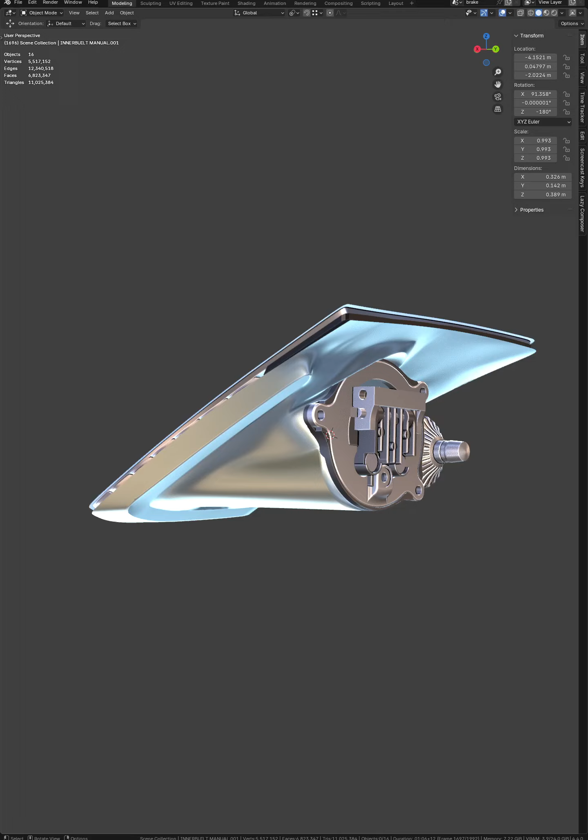Okay, so on the headlight, this entire weird back face I had to make manually, which I was trying not to have to do because it was a huge pain in the dick.

But now I can super easily add your mounting tabs. And then I got to cut out the holes for the switch backs and whatnot.

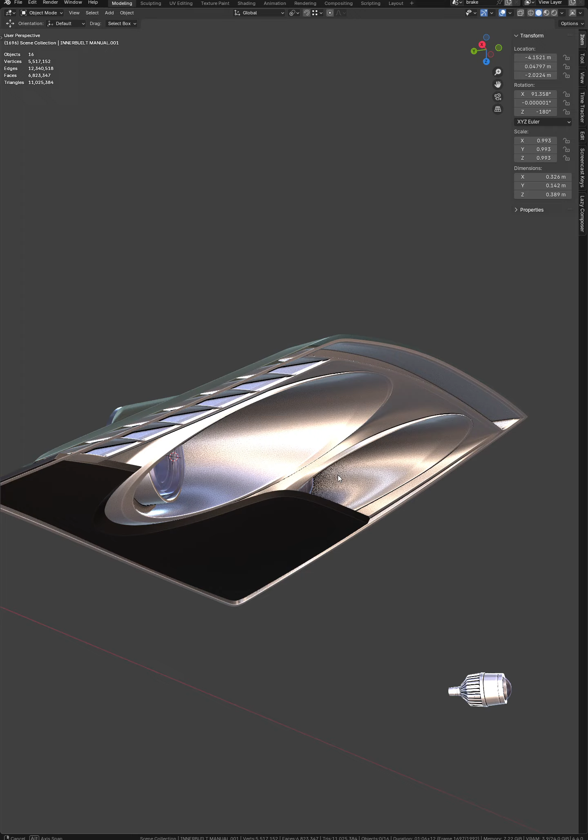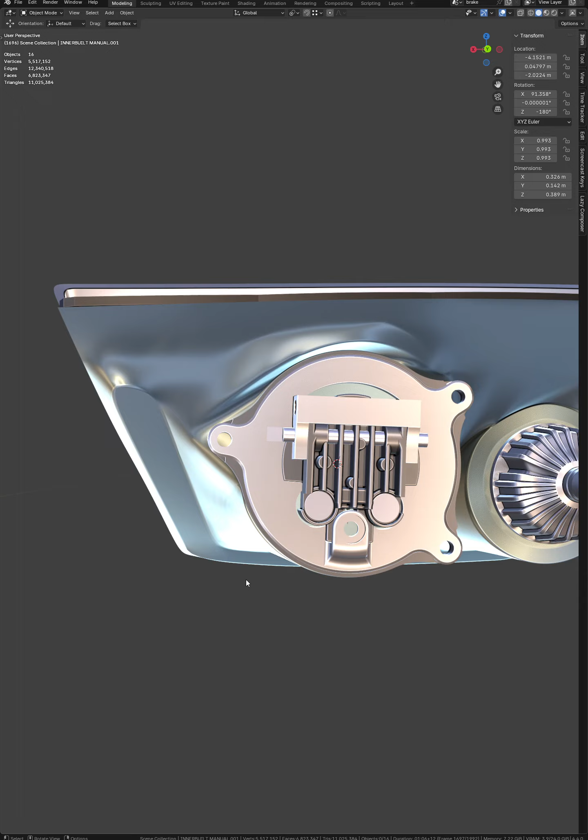But yeah, so for mounting, putting the mounting tabs to mount the headlight onto the car, that's not a concern at all. I just haven't done it yet because I have to have this other shit figured out to be able to permanently merge them onto it, because then I lose the ability to edit it at all.

Yeah, so this doesn't have the brim to wrap the headlight around it or anything like that, just on this version, but that's done. That's not a thing that's going to take any time. And then the lens fits over this still too, which is nice.

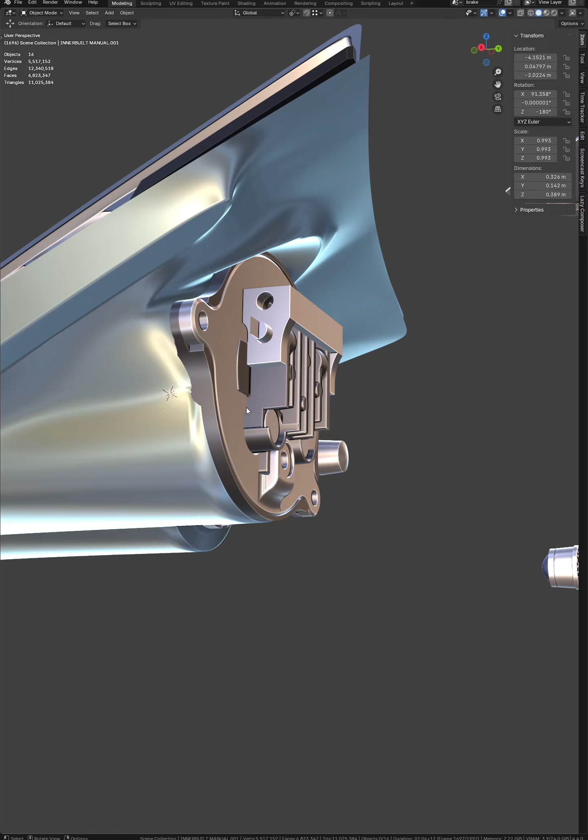But anyway, for the headlight mounts, here's sort of what I have. Hide the back face, hide this.

So this one I don't have the mount built for it. It's way simpler, it just takes a bolt straight through the side.

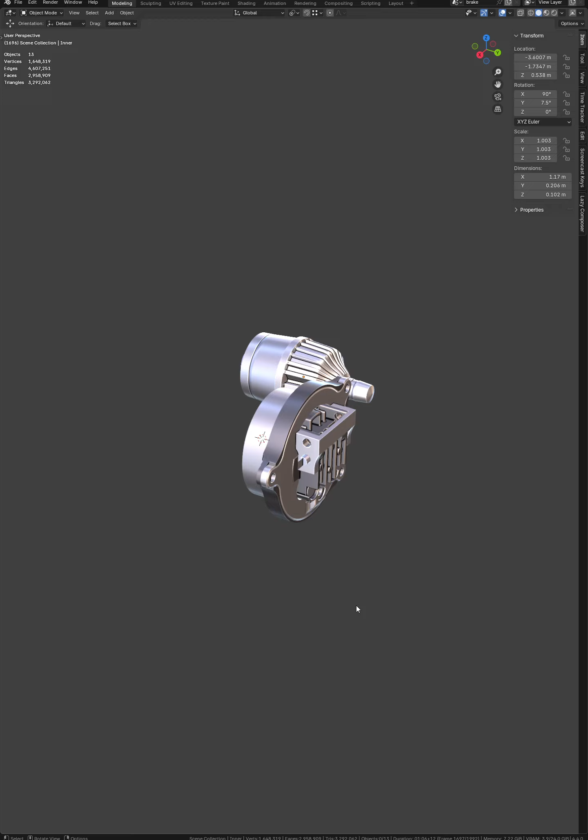So I made this thing because the way the mounts are on this headlight, if you want to be able to remove it from the back, which makes sense if the headlight has a lens on it, the mounts have to go. The mounts are set up to where you have to mount it to something and then put it in the back.

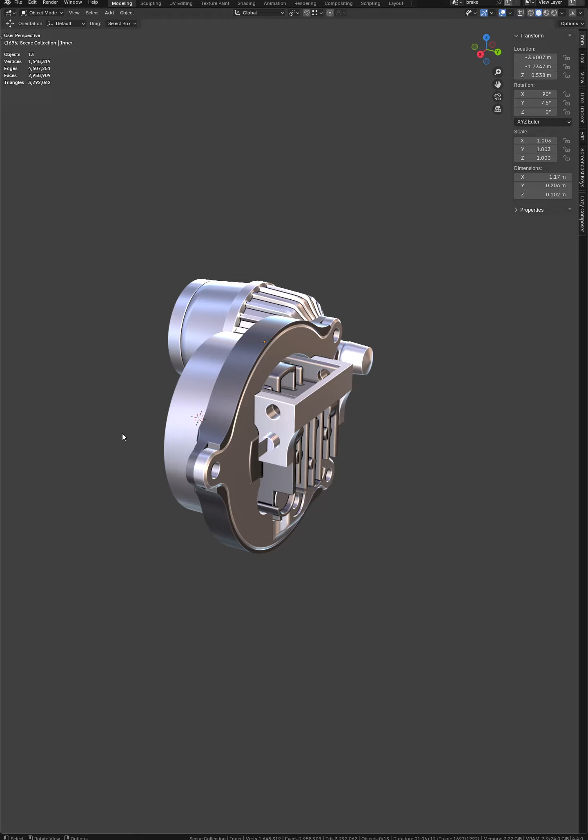So this is sort of what I had. This is a fucking shitload of work, but I don't know if it's the best idea, at least not on like a simple first run of the headlight lens.

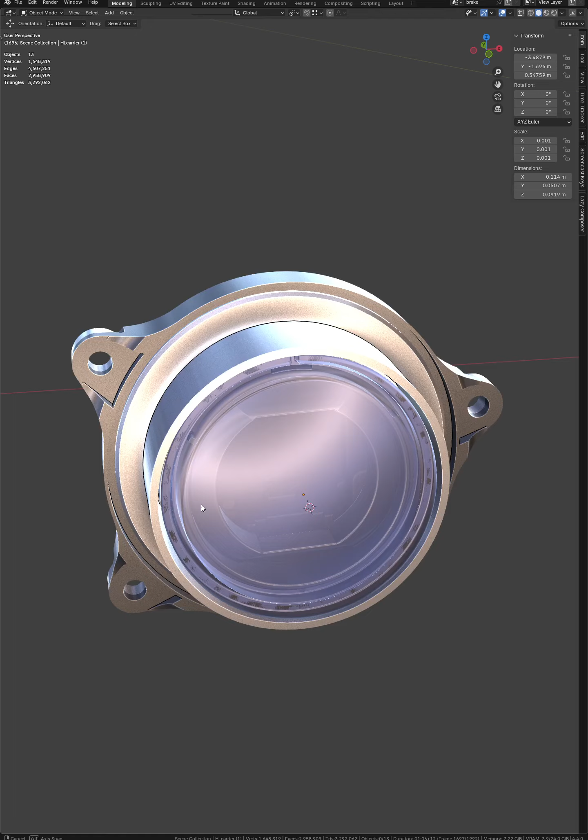Like if we're able to do it cheaply, I don't think a printer will pick up the details this thing has, and then still be able to print the whole housing without sectioning it. And then there's really not a way to section the headlight and still be able to sand the join lines out of it and shit.

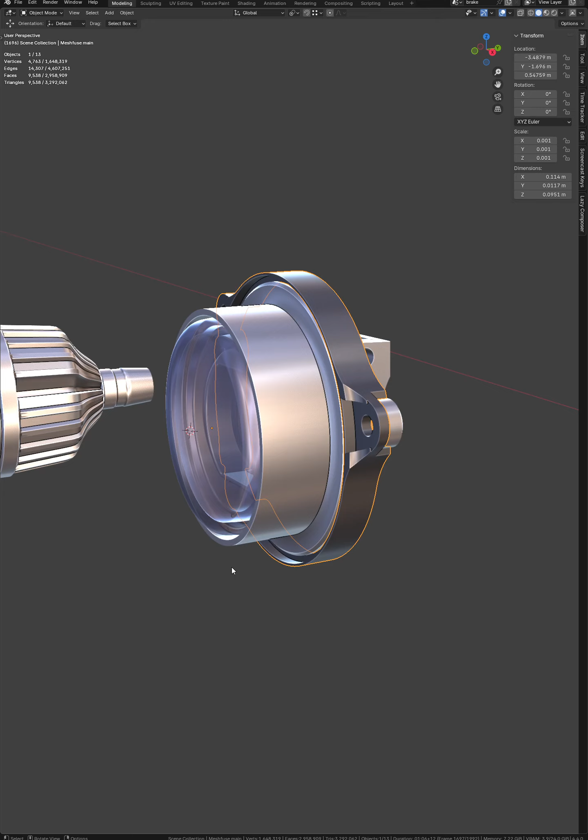So if we're looking at just getting something for now that'll be like a 95% housing, I think we can do that without these at all. But that's going to require you to rig up something to mount these headlights in there. But here's basically what I have.

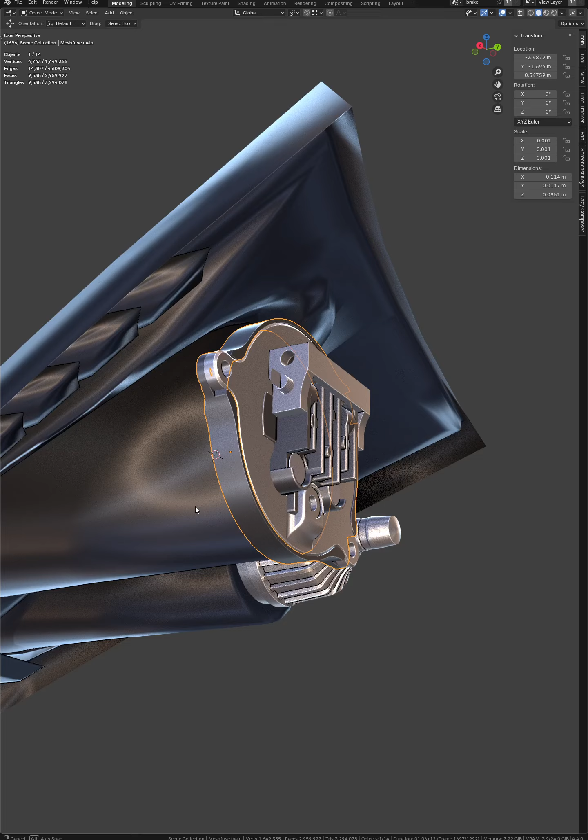So this black piece is basically what I was just going to join into the housing. So this was going to be joined to that part, so you basically just have a bolt face, like a flange to drop this into.

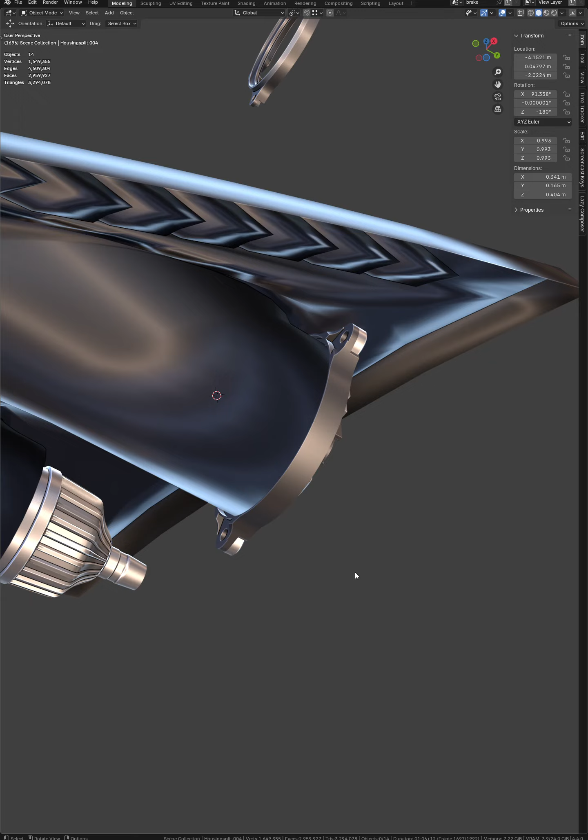But I don't think it'll print this part and this part all in one piece on a hot plastic type printer, because it's going to have to generate supports everywhere.

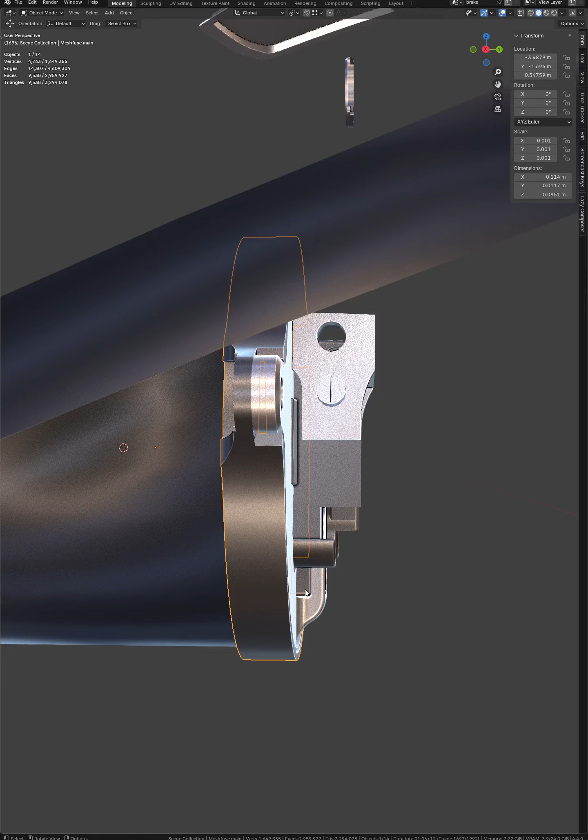And then the other problem with that is all the mounting tabs, they work best if the layer lines are perfectly parallel to them, because otherwise you get it like just sticking hot plastic together, and then the way the lines are printed, the tab gets really weak.

So between having these mounting tabs printed this way and then the other ones that are to mount the housing to the car, one of the two is going to be weak.

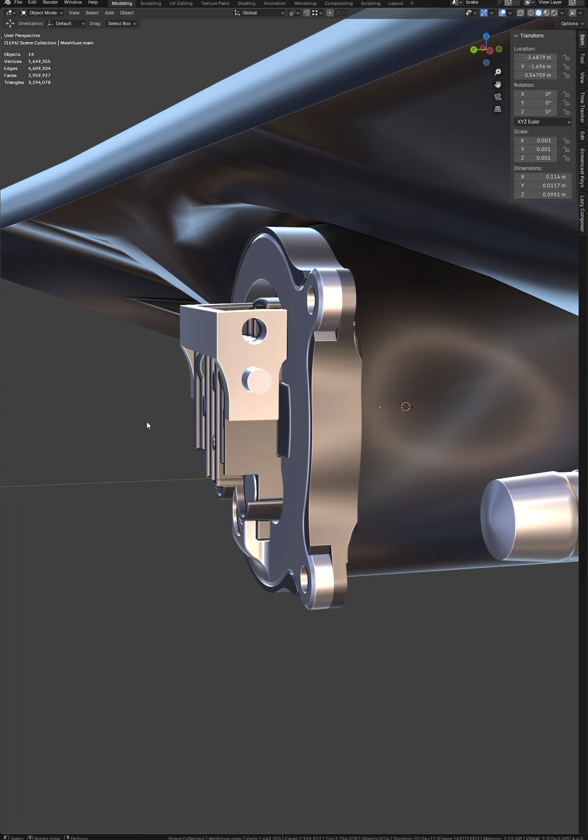So I'm thinking about just getting rid of this entirely, and then I can do this if we end up having something printed in resin, and then end up doing like a super detailed version of it. Especially if that's something you want to do and it's finalized, and then you know it's going to be the last headlight housing you're going to ever have to print, which we'll be more confident in after we print a simpler one. But anyway, so there's the housing.

And then just hide this whole light.

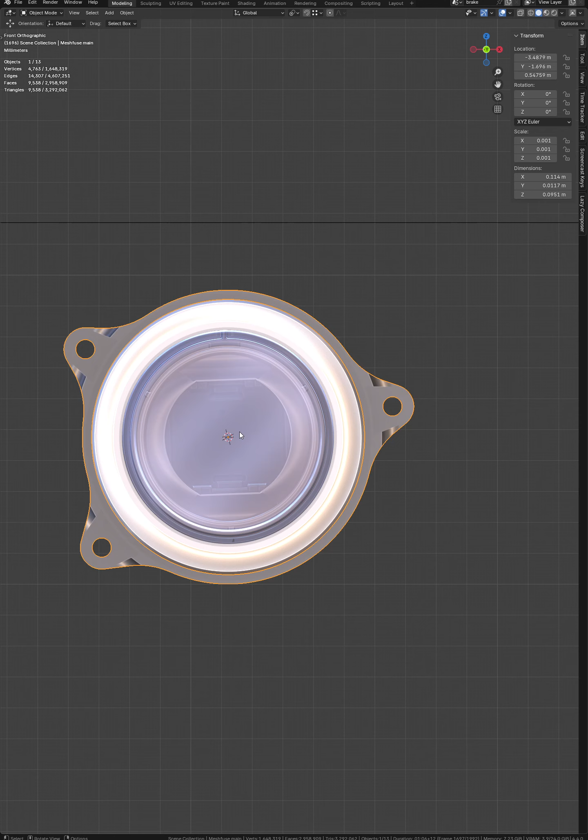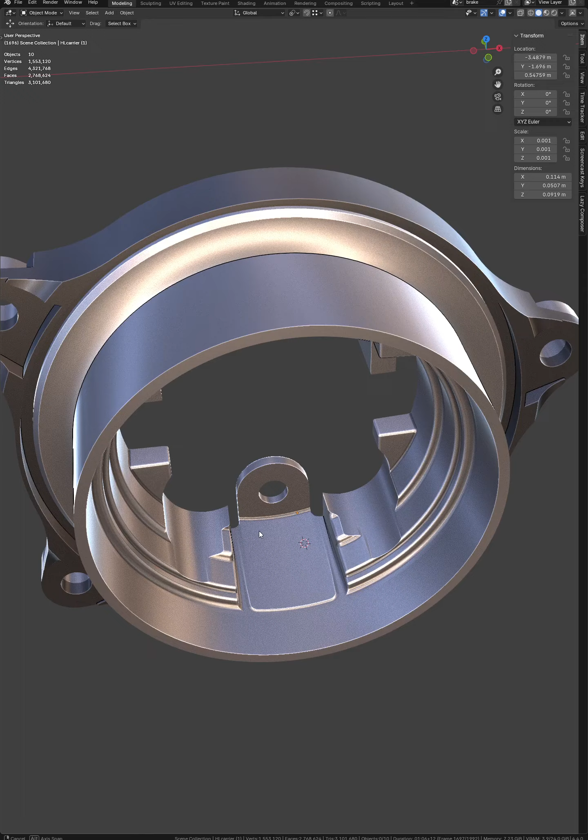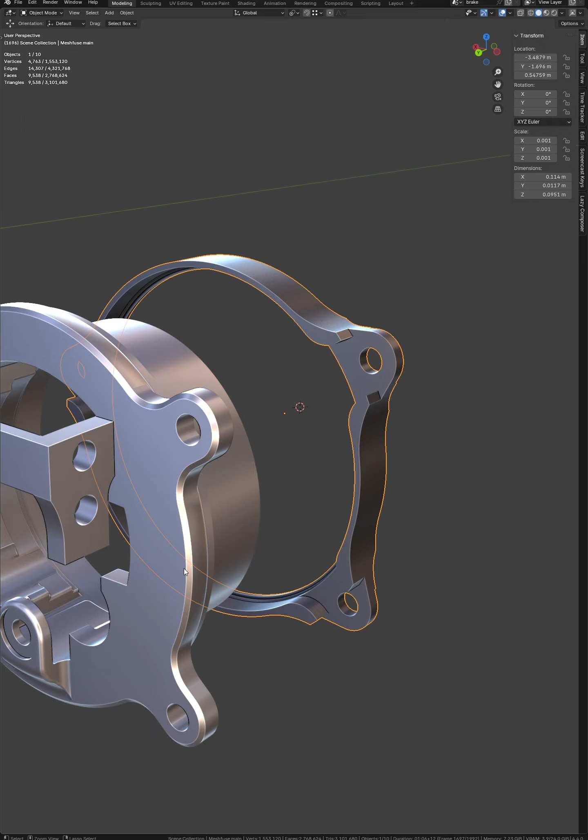Okay, so basically, this was a fucking shitload of work, as you can imagine. So basically, there's a carrier that comes in, so the light would bolt to this, and then I haven't added the bezel, the finishing bezel to go on the front side of the light or any of that yet, but it would have a carrier, and then this black part would be welded to the housing. You'd be able to drop it in. This is made to take an O-ring as well to seal it.

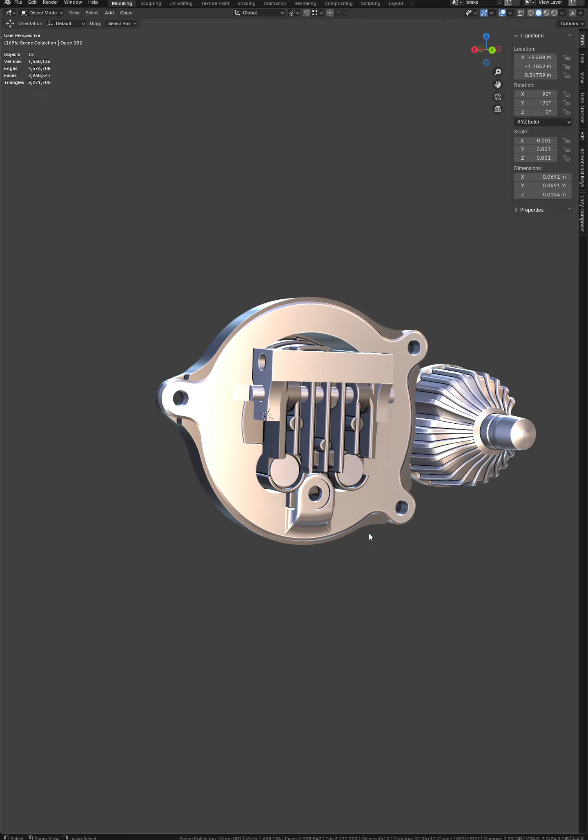So it's got a mount. When we were actually looking at it, you notice that the light had this in it. I actually figured out what size bolt can go in there, and then it'll be held from turning, so it'll be facing out.

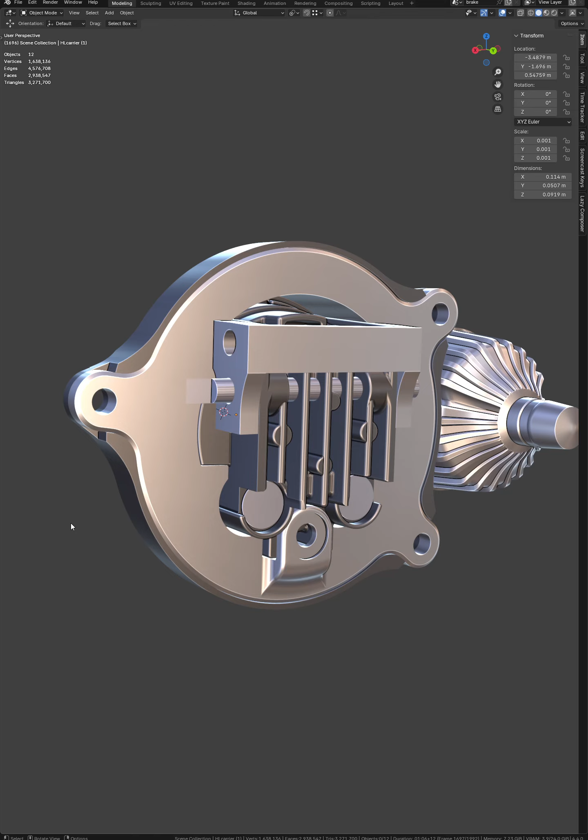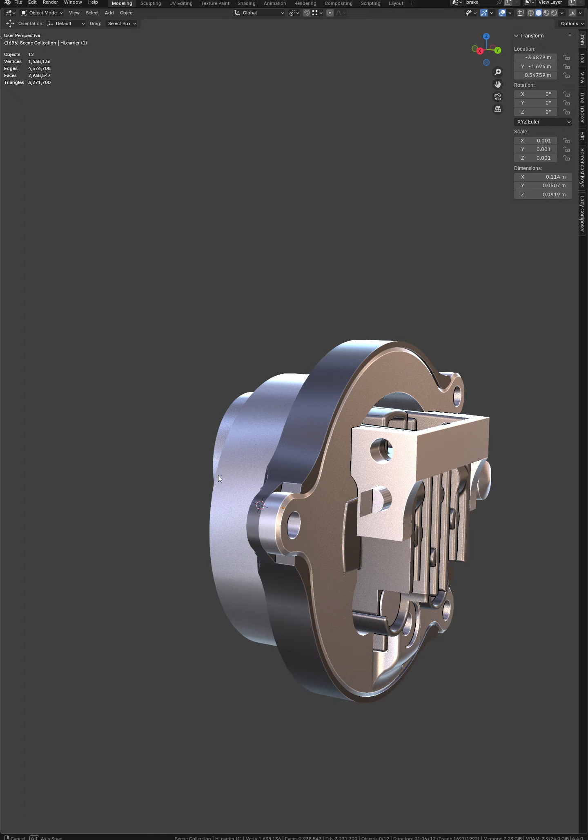And then we could put a nut there, so it'll have a mount in 3 different spots. There's also a way I can make this adjustable. This version isn't, but because of this extra hole that I don't know what the fuck, I think it had to be for some kind of adjuster. I can actually make this adjustable with a little bit more effort, especially if we're going for something that's super detailed, like the final lens or final housing. I could have it adjustable by a few degrees, and shit like that. But a lot of this detail...

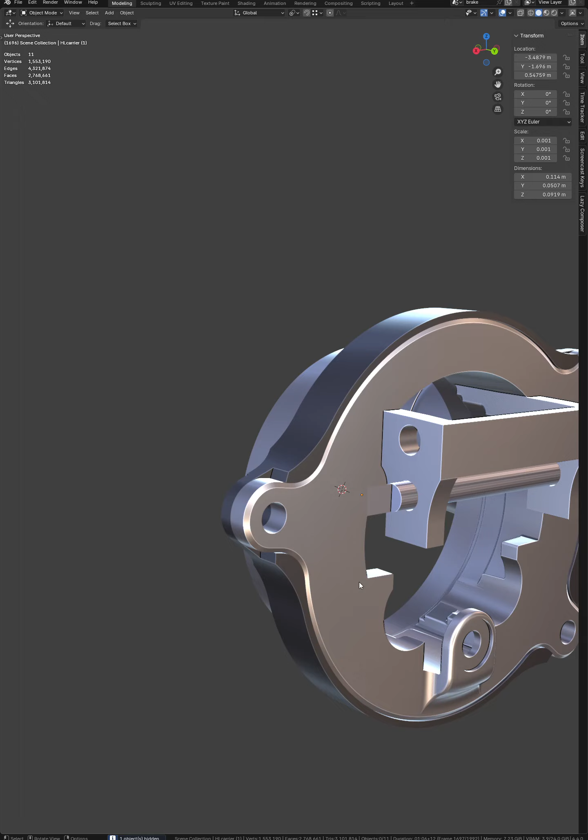Like if I was just printing this bracket, or any of these parts, a printer could do it in decent detail. I don't think it can do all of it as one piece in decent detail. And then the way the housing's set up now, it's gonna be kind of fucking hard to separate. But yeah, anyway, that's where I'm at.

Let me know if you think you can get these lights in there. Again, this one just has a bolt on either side, so this one's much easier.

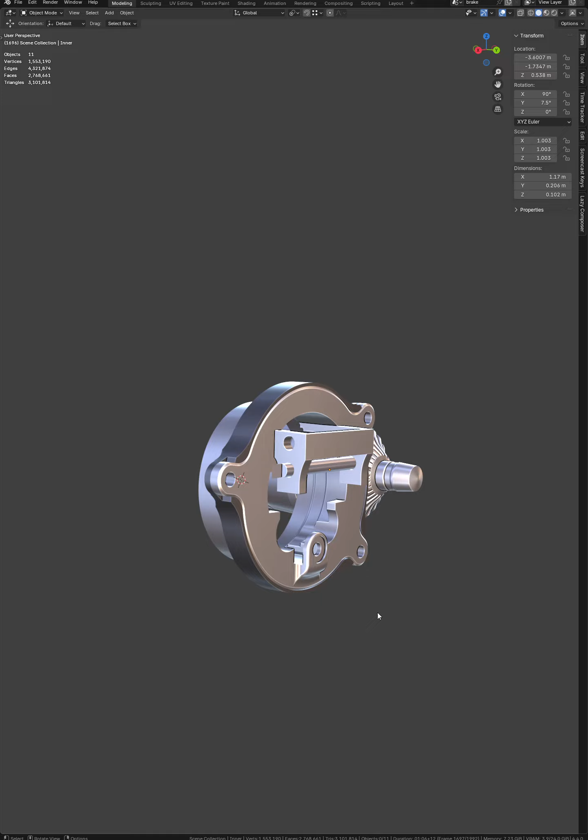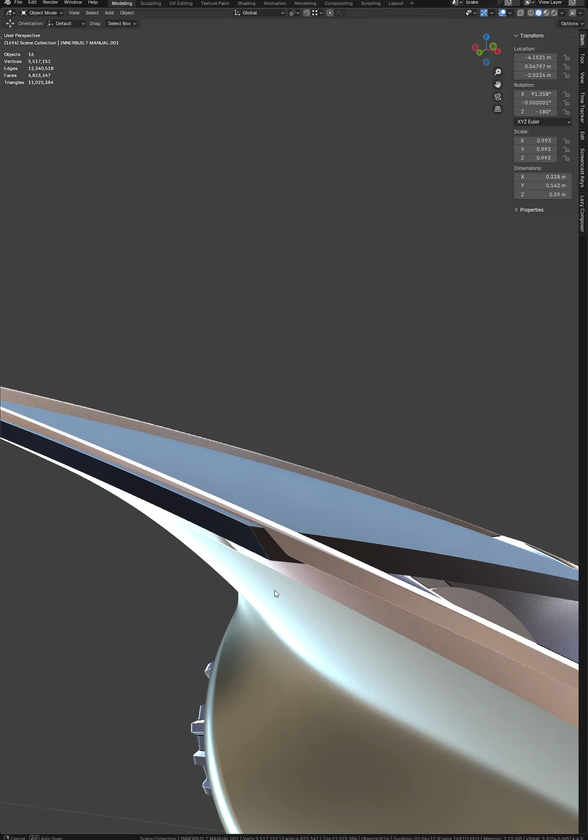The only other idea I had, other than doing this, was so I can go back far enough. But yeah, so my idea of splitting the cone separately would have worked if I could automatically give this part thickness, like this part where you can see through - it's thickened, but there's not a good way to automatically just make everything that much thicker.

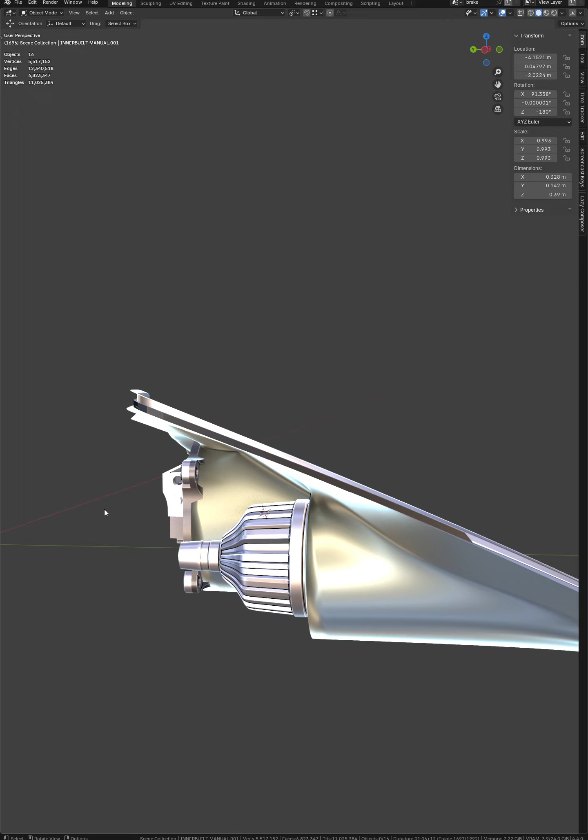I could do it on fenders and shit, but something this complicated, it sucks at it. So I ended up having to build it all manually. So everything here is at least 5 millimeters thick, but some of it's obviously way thicker. But that was a nightmare.

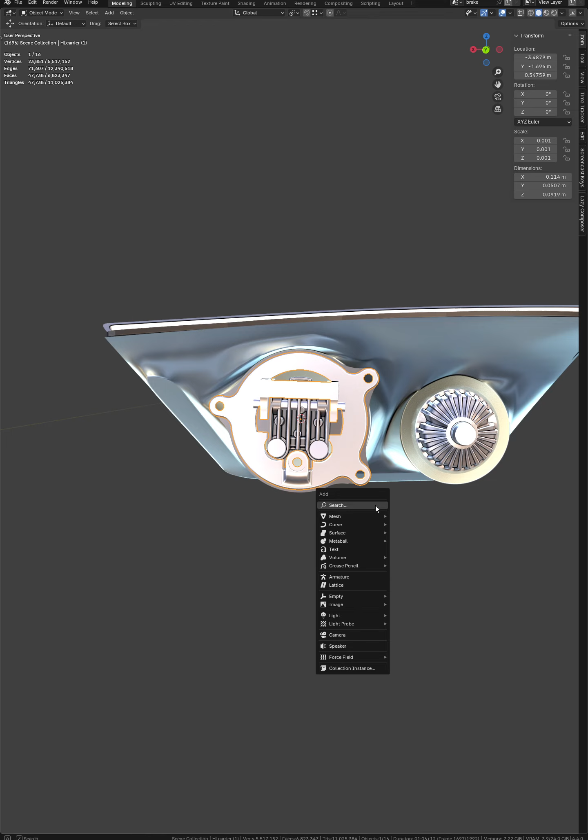But anyway, so the only other idea I had was, instead of giving you this bolt face here to mount the lights into, was actually to build like a carrier. So, a fucking huge cube.

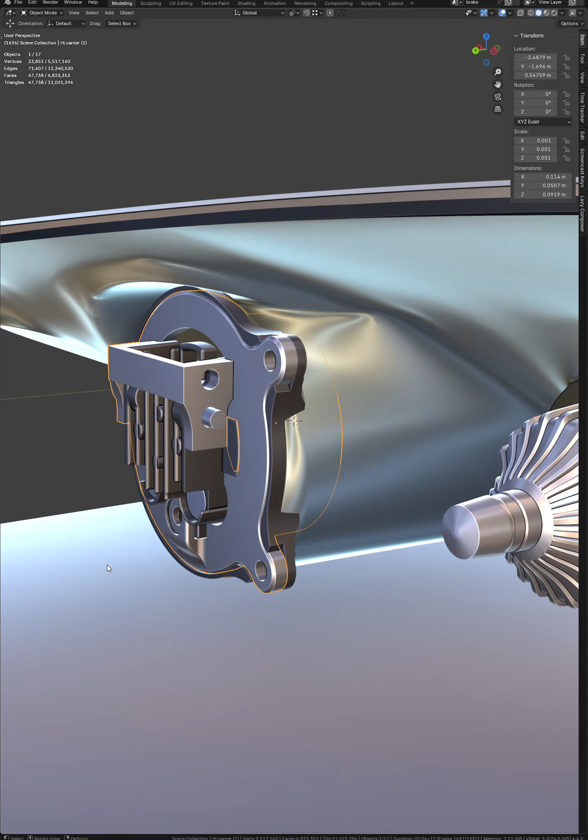So something like this - this plate, or just a bracket, I could obviously cut this way down, but this plate would have all the mounts. All of this would be gone. So this plate would have brackets built into it to mount the lights to it.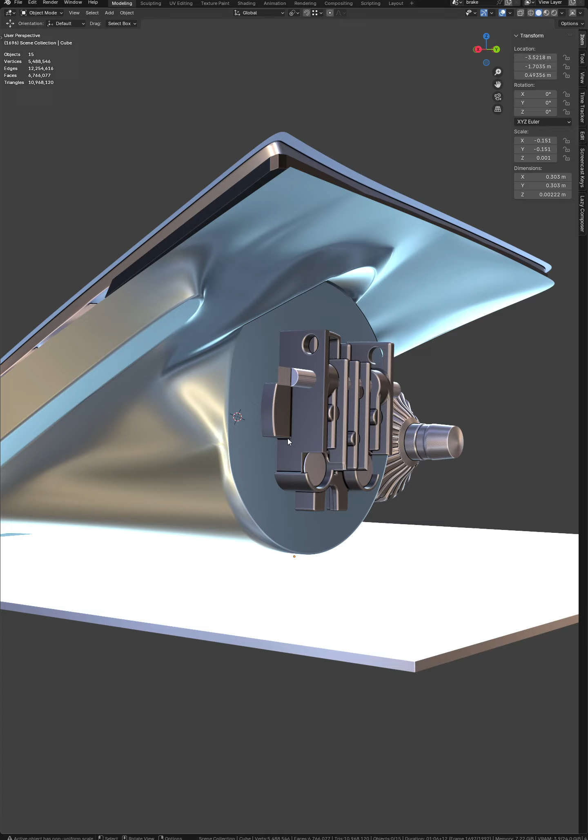And then this would attach to the housing rather than the lights directly attaching to the housing. That would be another way to do it. That would be easier for a printer to print. And then the housing would basically just have to slip over the lights at that point, because everything else would be removable from the back that way, if that makes sense. But anyway, let me know your thoughts.